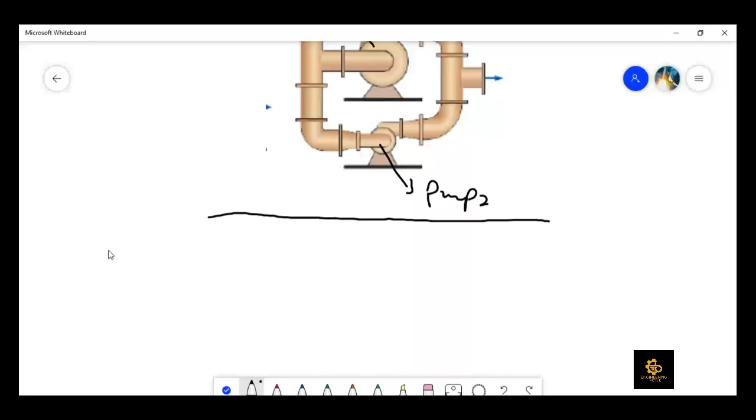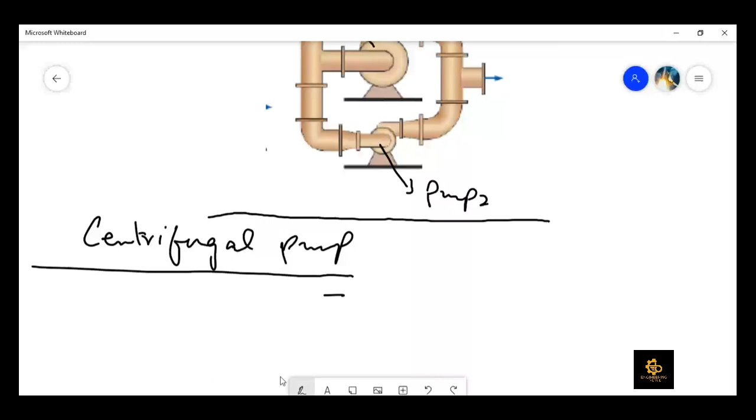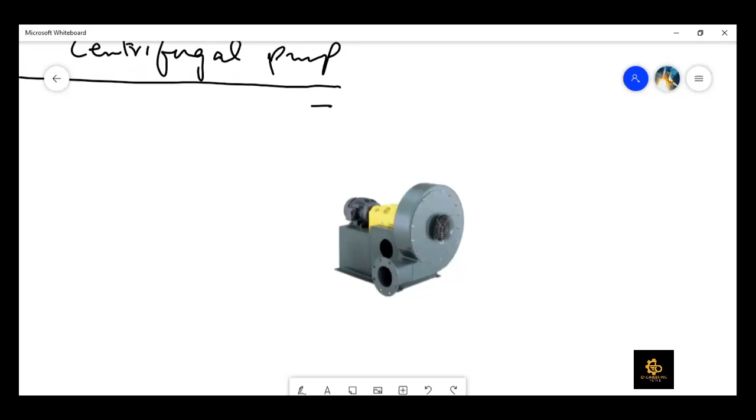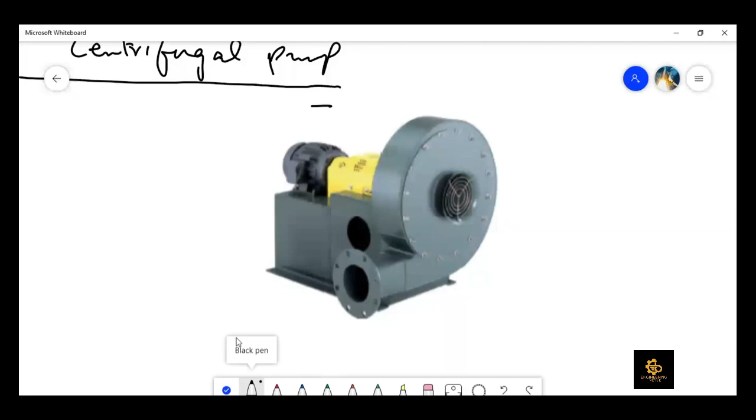If I can show you the picture of the pump, maybe you can readily understand what I am talking about. So this is a picture of a centrifugal pump, and there are certain things you can see here. This is the motor, which drives the shaft. The shaft is somewhere here inside this, which is connected with the impeller, which is here, impeller, and then here we have got the impeller blade.

I could show you the schematic in a while, but just to tell you the operation: when we switch on the motor, this is the inlet, which is connected with the storage tank on the ground level, and then the water comes from here, goes inside this, and then it comes into this casing, which we usually call scroll or volute.

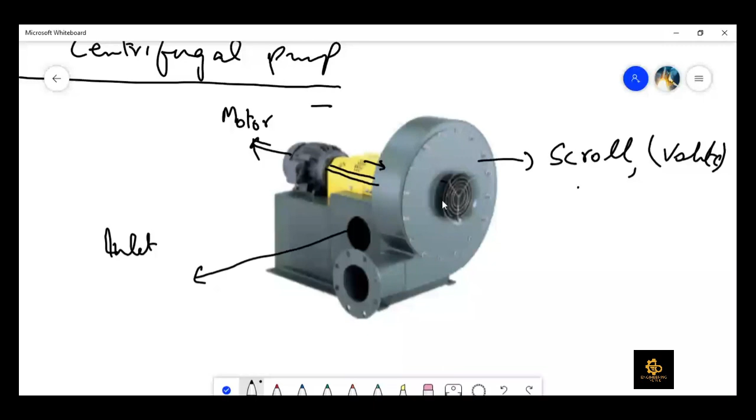So it comes into the casing, and then water flows in this direction, and inside this casing, we have got the impeller and the blade. So then it moves in the radial direction, and then it takes a circular motion, and then it comes out of this.

This is the outlet, and then this outlet has a pipe here which takes it to the overhead tank, right? This is inlet, this is outlet, this is motor, and this is the shaft. And inside this scroll, we have got impeller blades.

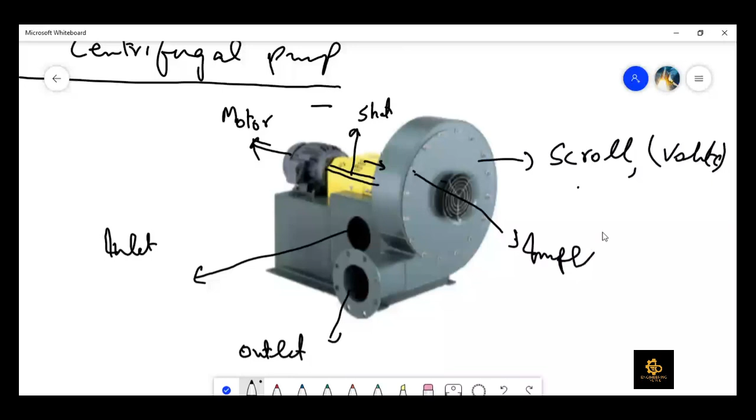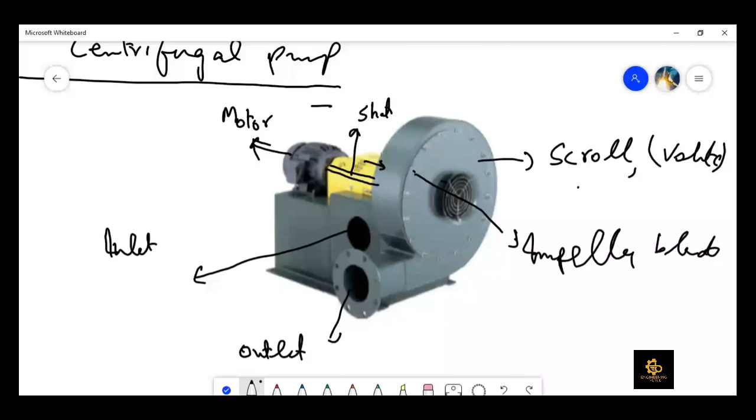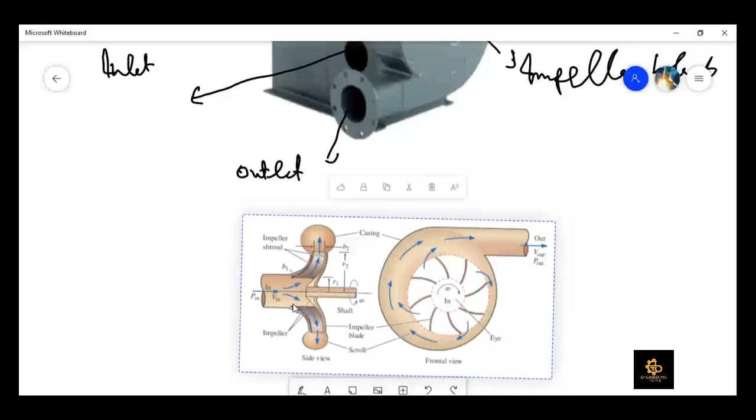Let me show you the schematic as well now, just to make things a little bit more clear. Okay, so here you can see some similarity.

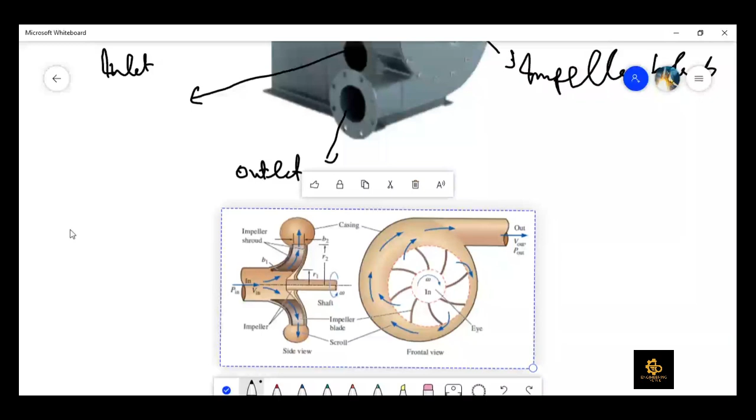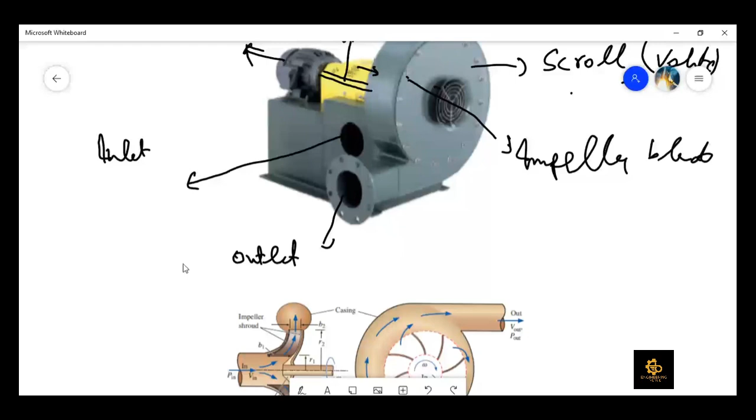So if we see it from the front, and reverse, it is the reverse of this. If we see it from the negative y-axis, it is kind of the same thing, right? And then if we see it from here, this side view - if we see it from here, that is the front view, and then this is the side view. So the side view is shown here, I think. Right? So this is the side view.

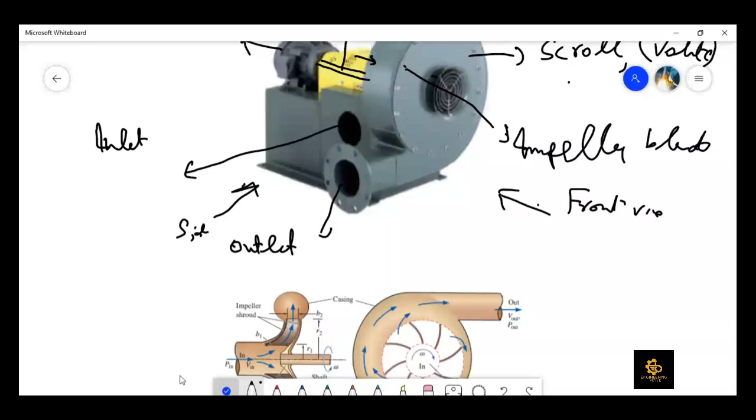So here, this is the shaft, and then it is coming in axially, and then it is going in the radial direction. And the impeller blade, which is inside this volute, is shown here. Right? So this is the shaft or the impeller eye. So it is rotating, and the flow comes here, and then it actually comes out of the board, and then it goes like this, right?

So first it comes axially in this direction, which is in the side view. For the front view, it means that it is coming out of the board. And then when it comes out of the board, because the blades are rotating, it imparts rotational kinetic energy into the fluid, and in the process, the velocity and pressure increase. Right, so this is the basic working principle of this.

And then second thing, if you realize here, if I show this thickness and this thickness, it is kind of increasing as the fluid goes towards the outlet. So it means, if I take it out and show it in a simplistic way, we are talking about a diffuser shape. So here it is minimum at point A, and at point B it is maximum. So A and B - so we know what is the characteristic of a diffuser?

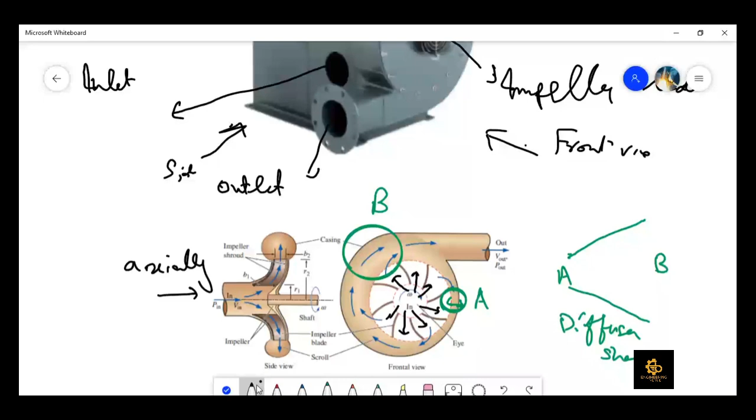That is - it increases pressure at the cost of decreasing velocity.

So it means that a dynamic head is changed into static head, and usually in case of pumps, we need some very high pressure at the outlet of the pump so that the fluid can travel against gravity towards its destination, whether that is an overhead tank or any other application. So for that purpose, we use higher pressure at the outlet, which is so at this point, if I write it,

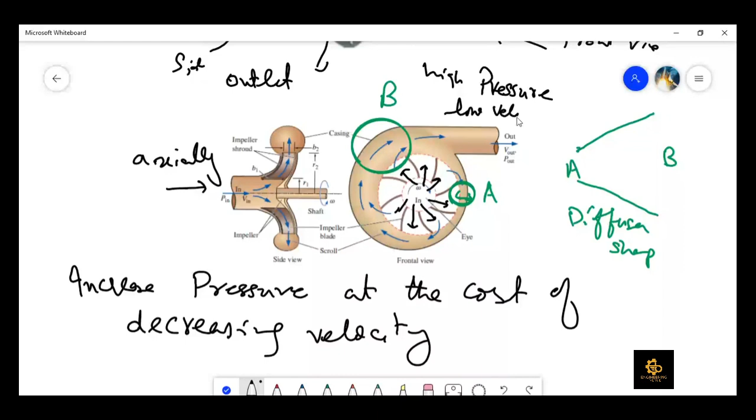high pressure, low velocity. But here at point A, high velocity and a little bit of lower pressure as compared to this at point B, right? As compared to at point B.

So this is the purpose of increasing the scroll area so that it can have more, which is shown here. It has got more outlet area. Inlet area is less, outlet area is more. So pressure increases at the expense of velocity.

This kinetic energy is a result of that velocity in the radial direction and due to the centrifugal force. So the flow leaves the impeller after gaining both speed and pressure. But a little bit of speed is reduced as it moves toward the outlet so that we can have high pressure at the outlet, right?

So this is a snail shaped casing, so we can recognize the centrifugal pump very easily. Usually the major purpose is to increase the pressure head at the outlet, not necessarily the velocity head. Because even if the velocity is lower, if the pressure head is there, the flow would move towards the overhead tank.

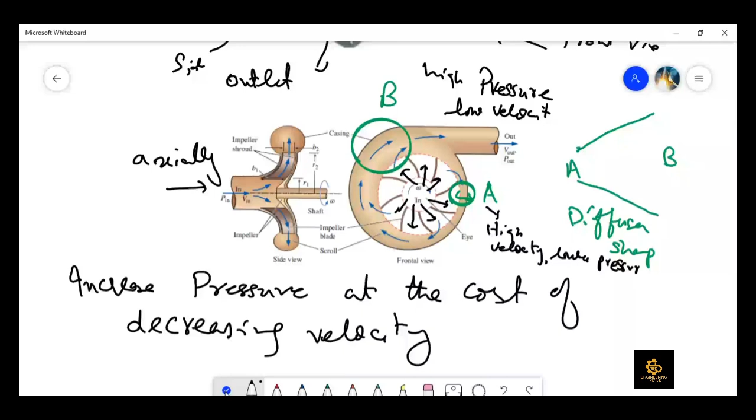One is called backward inclined blades. So the first centrifugal pump would have backward inclined blades. What does it mean backward? Because the flow is moving in this direction.

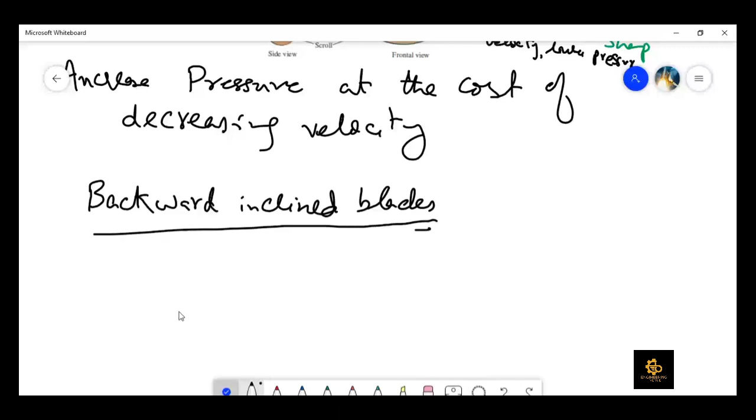So if we take it the forward direction, where the flow is moving, if you see the angle of the blade, it is in reverse direction. In this, let's suppose this clockwise direction is forward direction. So these are kind of giving the flow an anti-clockwise kind of direction. So that kind of blades are called backward inclined blades.

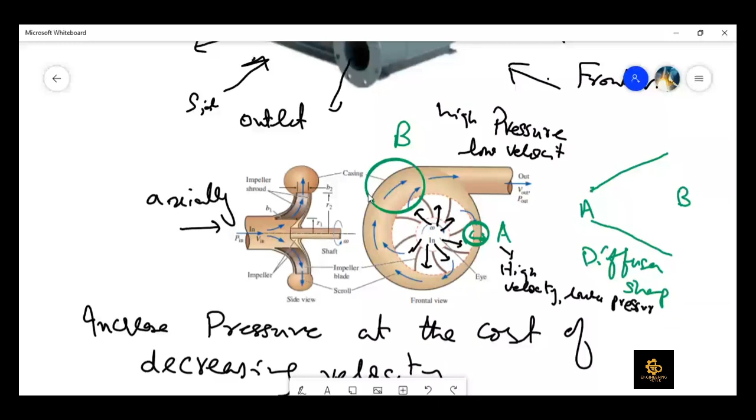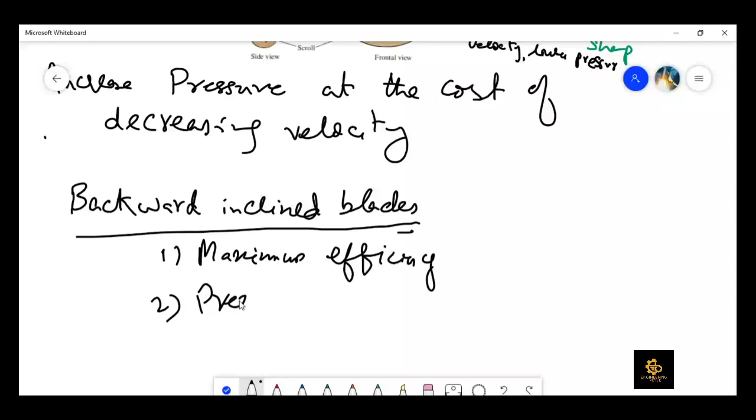And what are the major characteristics of backward inclined blades? It gives us maximum efficiency among the three arrangements, the pressure rise is intermediate, and the operating range is also limited. I would explain this third point when we discuss the characteristic curves in a while.

So now that was the backward inclined blades. Then the second type of blades, we call it radial blades. So what are radial blades? Let me show you the difference between this backward blade and radial blade.

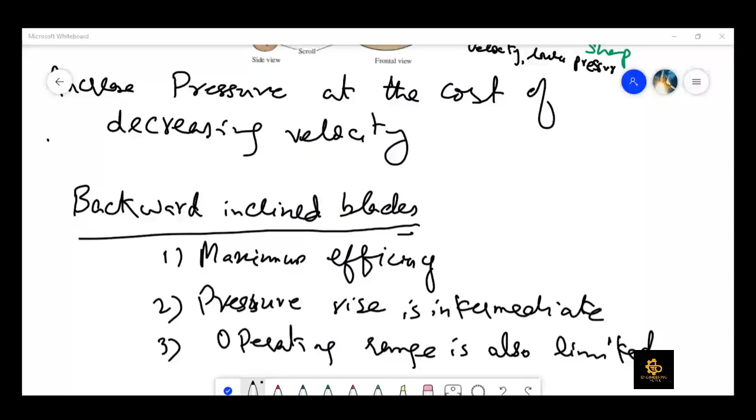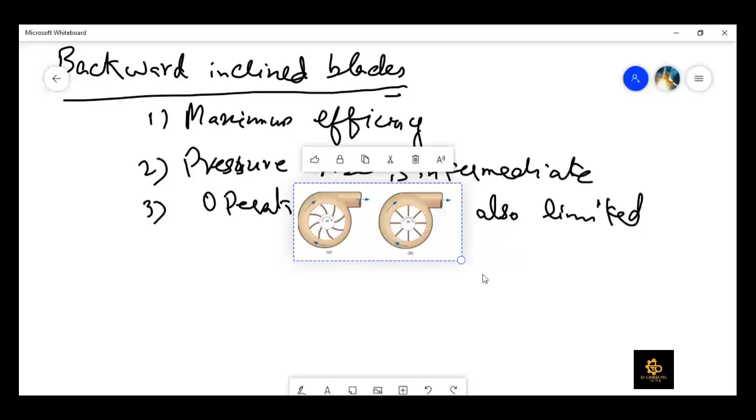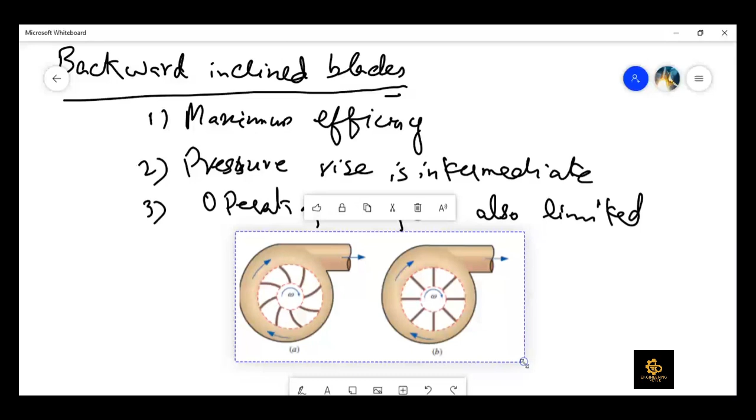Okay, so here you can see that figure A is backward inclined blade, because if the fluid is going in the forward clockwise direction, this angle of the blade is trying to give the fluid a backward anti-clockwise direction. And then this is a radial blade, so there is no angle imparted by the fluid blade, it is kind of a straight blade arrangement.

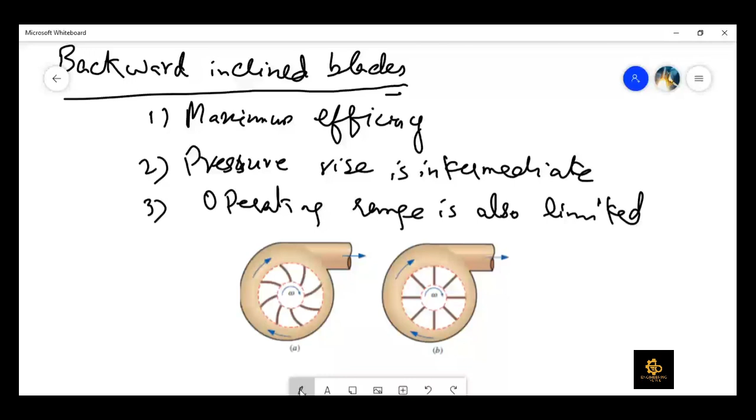So we call it radial blade, radial blade impeller. Right? So usually, what are the characteristics of this?

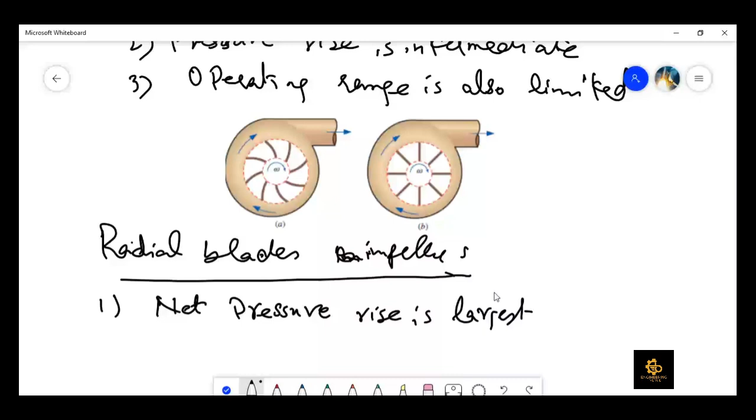That the net pressure rise is the largest in this case, but efficiency decreases rapidly

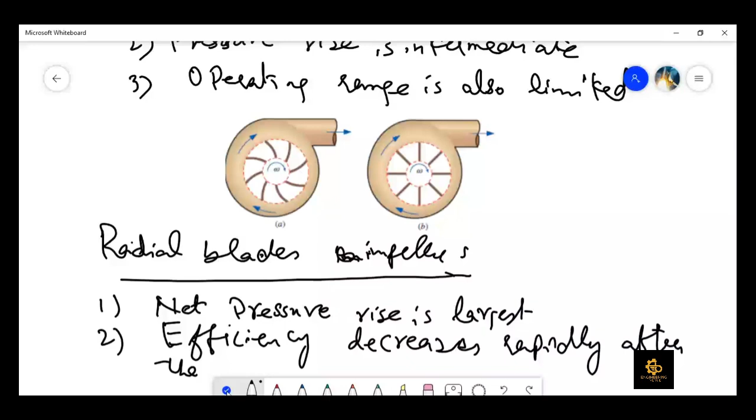after the BEP. What is BEP? BEP is the best efficiency point, the maximum efficiency point. After the BEP, efficiency decreases very rapidly, and also the pressure rise decreases very rapidly. We will see it in a while once we show the characteristics for these three blades.

So it means that the volume flow rate range is also limited. Right, and these were the second type of centrifugal pump blades.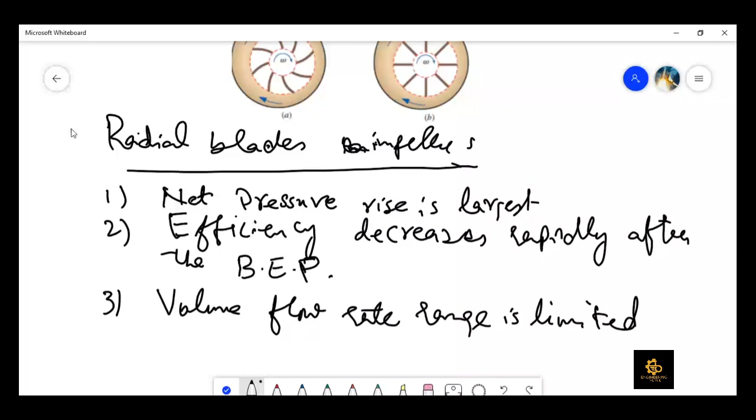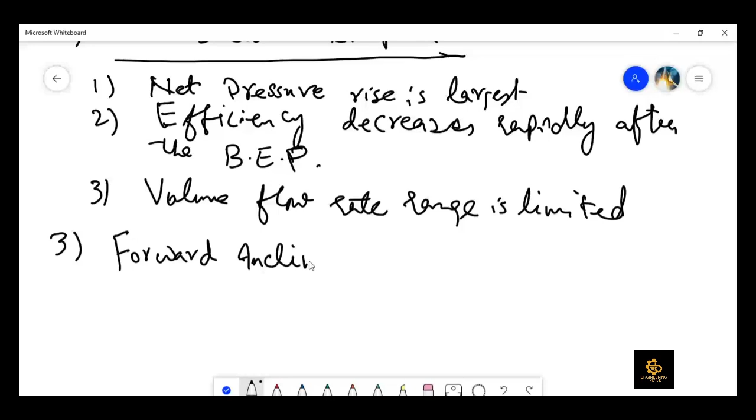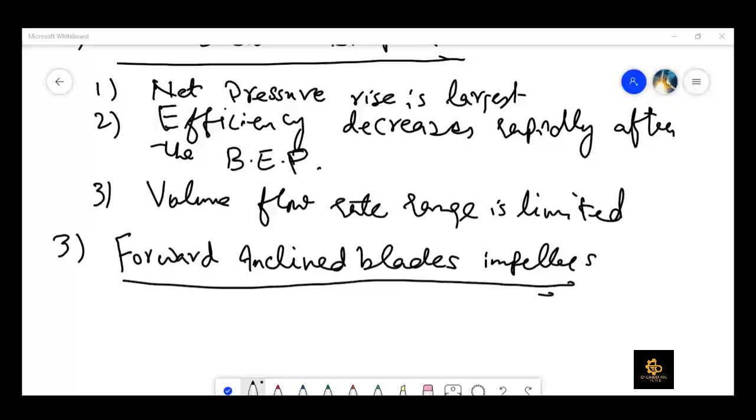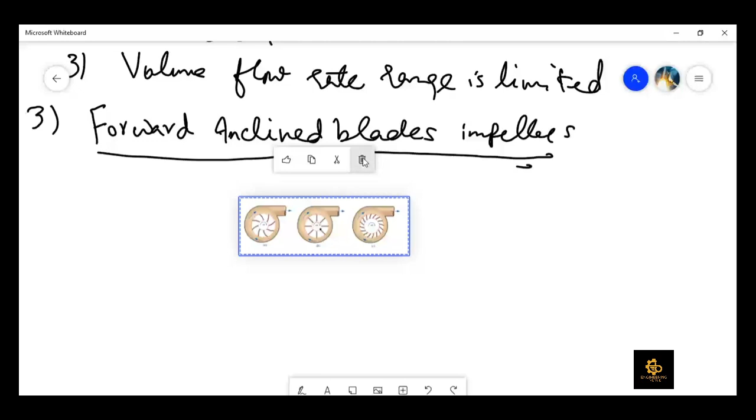Number three is what we call forward inclined blades. So let me show you the diagram for that. Now I'm going to show all three diagrams side by side just to make things a little more clear.

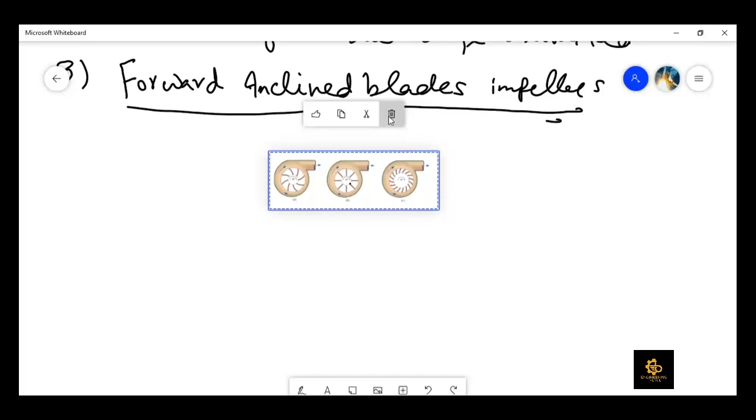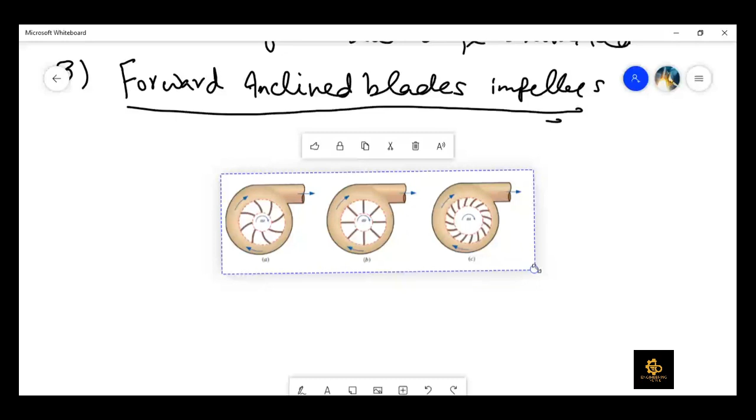So figure A is for the backward inclined blades, figure B is for the radial blades, and figure C is for the forward inclined blades. Now there are certain differences between these three blades which you can readily see in case of forward blade. One is it has got a very large number of blades as compared to the radial one and backward angle blades. Second thing you can see is that the impeller diameter or impeller eye is quite big. This circle here is very big.

Here it is quite small in both these cases. So what is the consequence of this? The blade length is quite small in this case. So it can accommodate more volume flow rate, or it can be used for a larger range of volume flow rate applications. So usually we install forward inclined blades when we require a constant pressure for a larger range of volume flow rate.

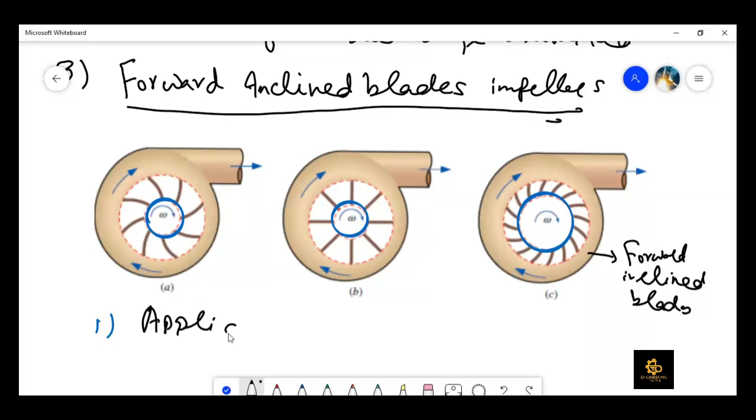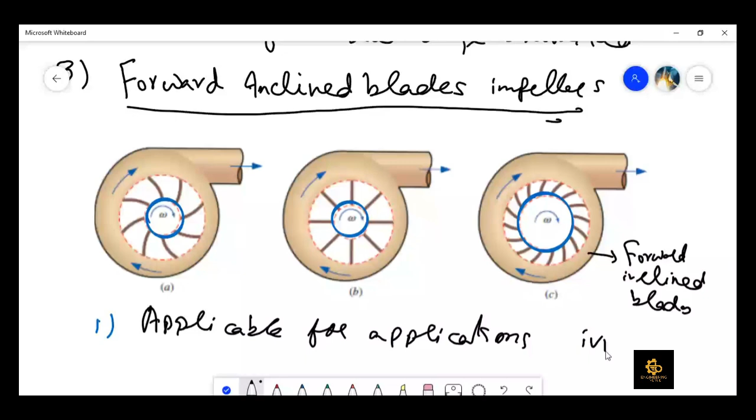So let me write it: applicable for applications involving a wide range of volume flow rate. So it has got wide range application.

So in case of forward inclined blades, it has got the pressure head which is minimum. The pressure head rise across the blade is minimum. How do we know that? Let me show you the characteristic curves for the three arrangements.

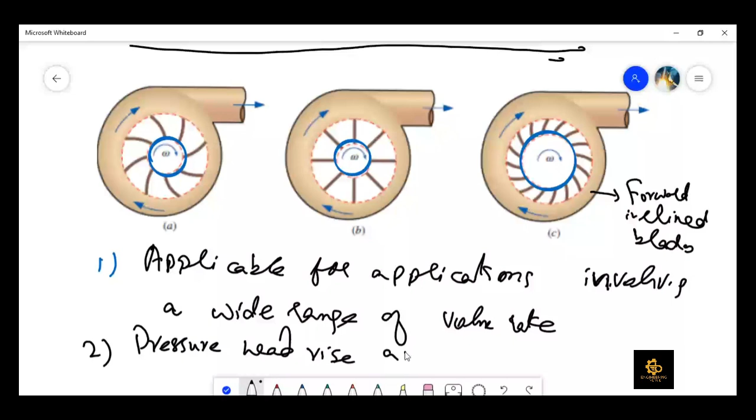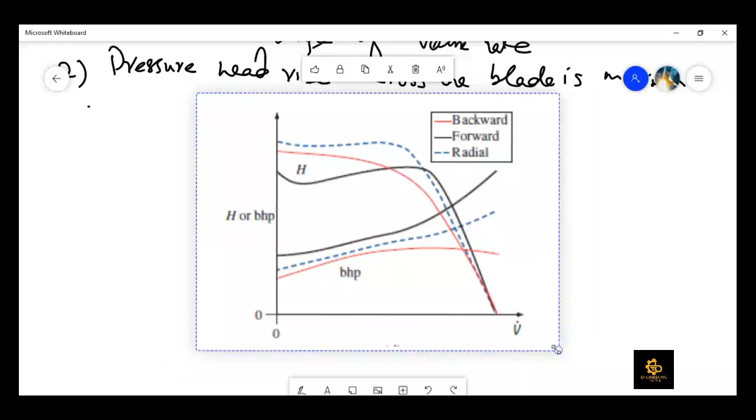Here you can see the curves which are for the net head for a certain kind of arrangement. So if you can see, the radial one gives us the maximum head. But what is the drawback for this? After this point, the net head drops very sharply.

And it even decreases for the backward one also. But for the backward one, the decrease in head is a little bit gradual, as shown by this line. But for this dotted line, you can see that the slope of decrease is very rapid if we increase the volume flow rate beyond this point.

But for the forward one, you can see that it maintains a very acceptable pressure head even for a larger volume flow rate. So it means that if we want to use a pump that can be used for a wider range of volume flow rate, then we would prefer the forward inclined blade. But if we want a pump operated in a very small range, up till this point, for smaller volume flow rate, then the backward one is the best, because it gives us the maximum efficiency.

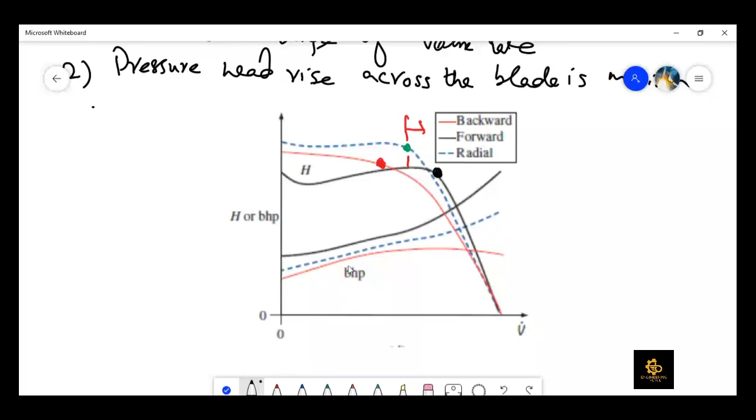And then you can see the BHP values. What is BHP, if you remember? BHP is tau into omega, where tau is the torque. So for a given rotational speed, this forward inclined blade would give us the maximum torque, followed by the radial one, and the least is given by the backward one.

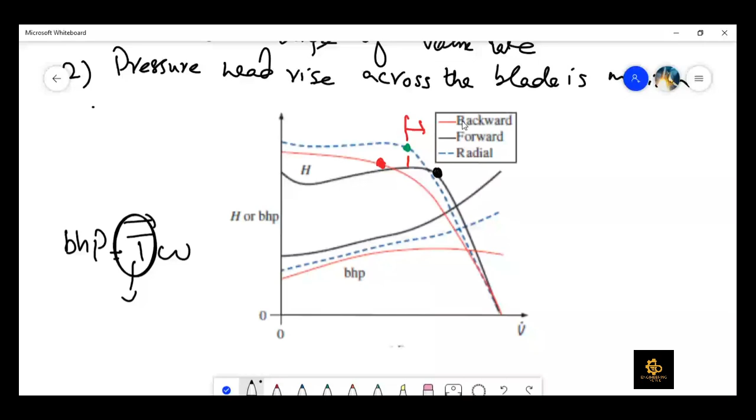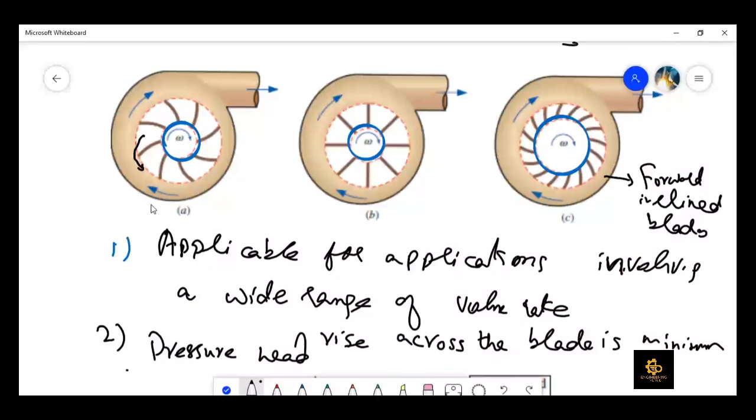Because backward, as you can see here, the flow is going to come in this direction, but actually it should go out. So there is a little bit of loss in BHP due to this reverse motion. But because it gives us very high pressure head, that's why we use it. So the pressure here is very good, so usually we can use it.

So just to summarize, if we want to use a situation or application where we are not sure about the range of volume flow rate, then we usually use this forward inclined impeller pump. Otherwise, if we want to get the maximum efficiency out of the pumping system, then we would use the backward one. So let me write it here.

If I can summarize it, if we want a wide range of volume flow rate, we will use forward inclined blades. If we want maximum net head at lower volume flow rates, then we would go towards radial blades. And if we want maximum efficiency at lower volume flow rates, then we would go towards backward blades.

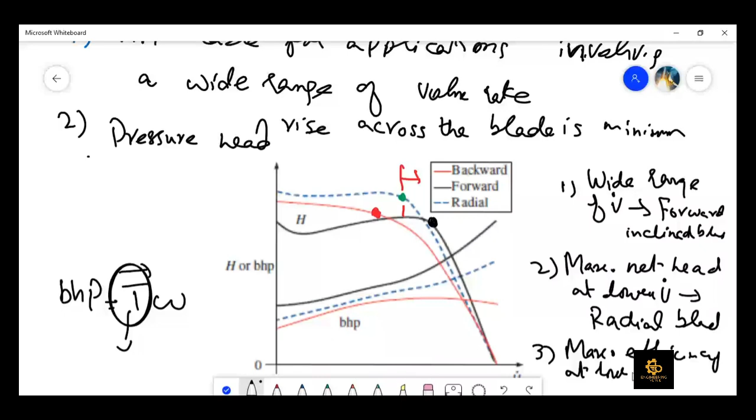So what is efficiency, by the way? Efficiency of a pump, if you remember, is the useful work imparted on the fluid, divided by BHP.

So these are the three parameters we usually use for the selection of the inclination of the blade angle, whether there is zero angle, minus angle, backward angle, or forward angle. These are the general selection criteria we usually use, right?

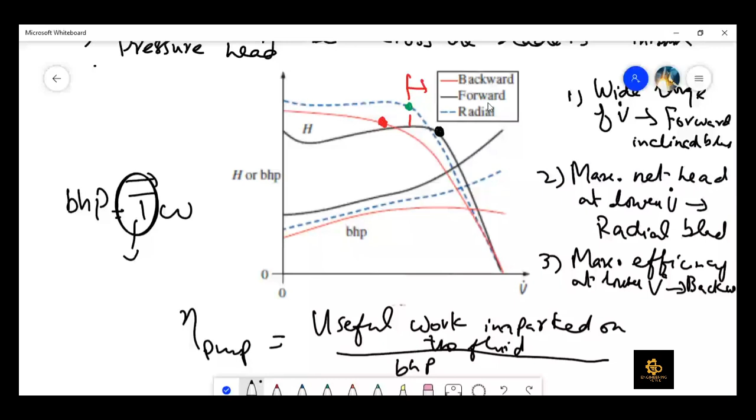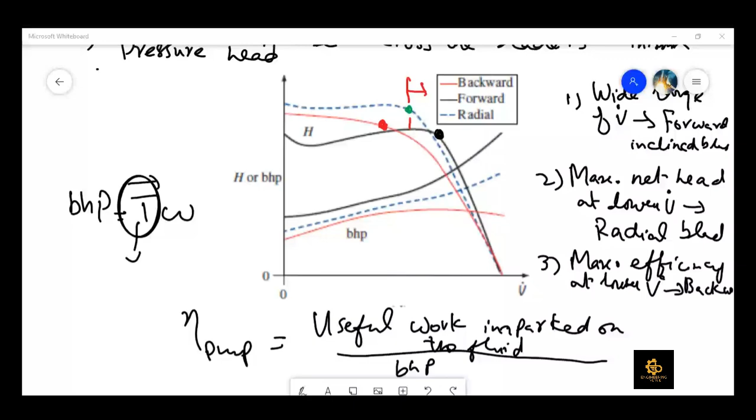So we discussed this, and now we can quickly go through the axial pumps, maybe in 5 minutes, because I just need to show a couple of slides for that. Let me tell you, it will take much less time, because I am just telling you the different types and working principles, since in the remaining classes we will discuss hydraulic turbines as well.

So we have just seen these characteristics for the centrifugal pump. Now we move on to the next type of pump, which are axial pumps. So what is the difference between centrifugal pump and axial pump? Before we move forward, what is the application of centrifugal pumps?

They are quite widely used. Let me tell you where they are used. They are used in home appliances like dishwashers, washing machines, dryers, water settling pumps which we usually install in our home, hair dryers, vacuum cleaners. They are also used in cars, the water pump in the engine, the air blower used for AC or heating applications. Centrifugal pumps are also used in industry, for building ventilation systems, washing operations, cooling ponds and cooling towers. So they have various applications.

Now we discuss briefly about axial pumps. What is the basic example of axial pumps? That is the ceiling fan we usually install in our home. They are a kind of axial pump, right? Or we call it, well, we call it a fan, because we are not concerned about the increase in pressure, but we are more concerned about the increase in volume flow rate, which strikes our body for the sake of therapeutic cooling to give us some comfort in summer.

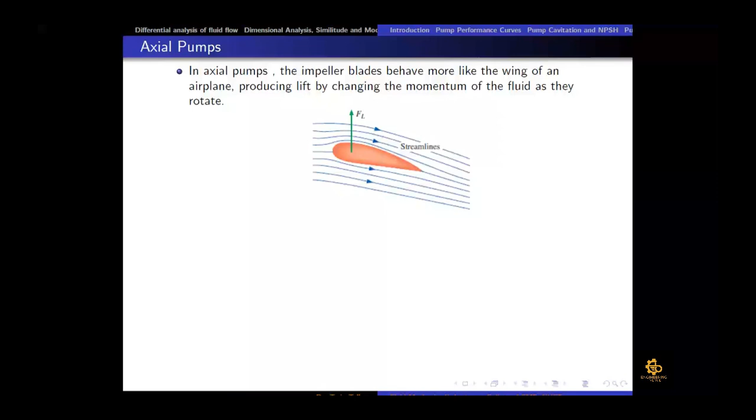And the second example of axial pumps, or axial fans, or propellers, is the blade of a helicopter. So what is the difference between axial pumps or fans and centrifugal pumps? The direction of flow remains almost perpendicular to the rotation. So the flow would come in this direction for the helicopter, coming from the top to bottom, and then go down, because the high pressure region would be created in the lower region, so there would be lift created in the upward direction.

So the lift force on the blade is caused by the pressure difference between the top and bottom surfaces of the blade, and the change in flow direction leads to a downwash, a column of descending air through the rotor blade. This kind of lift generation we also discussed in chapter 9, when we said there would be a high pressure region on the lower side and a lower pressure region on the upper side, so that the lift, that vertical force, would be there.

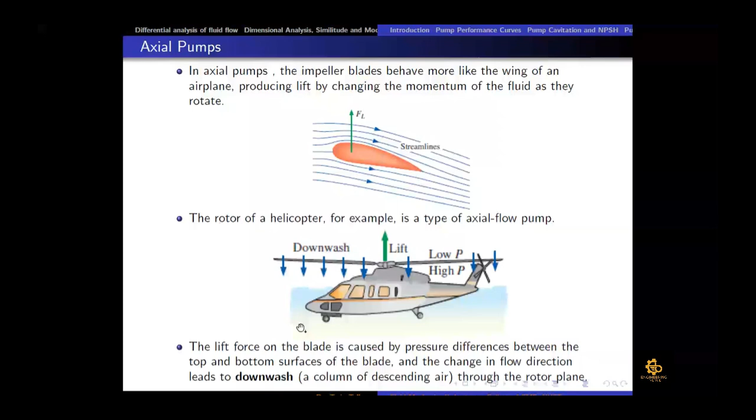Another example of that is the propeller, like this horizontal propeller. The rotor rotates in a vertical plane here, it's rotating in a horizontal plane. So that was the blade of this. But there are also some blades which rotate in the vertical plane, so that is called a propeller. We have ship propellers as well as aircraft propellers, like the C-130, which has some propellers in that. So both the helicopter rotor and the airplane propeller are examples of open axial flow fans.

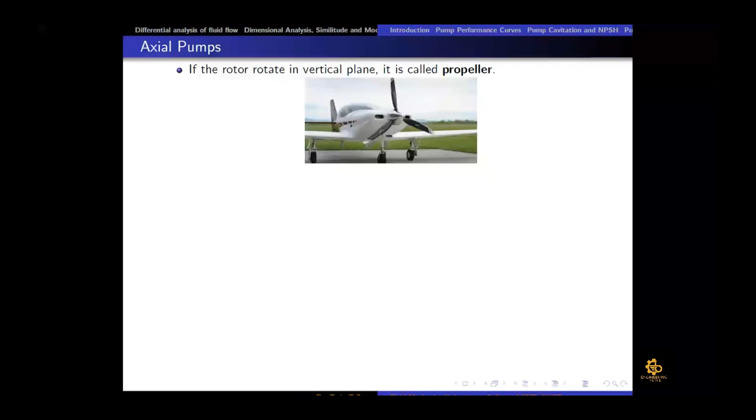Since there is no duct, there is no body bounding that flow. So they are open flow, like a ceiling fan, with no kind of casing. But in centrifugal pumps there was a casing - if you remember, that is the casing, if I can show you. This is the casing, so that is a kind of closed body pump. But these are open flow pumps or fans.

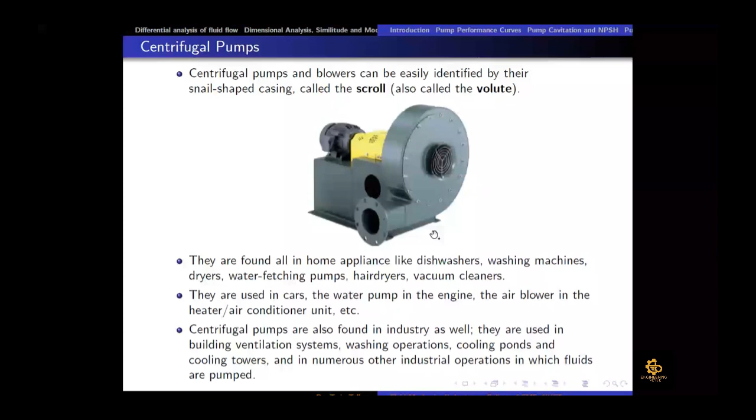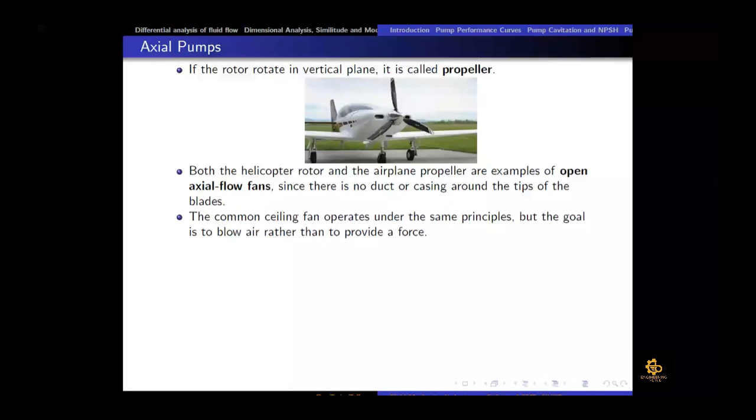So a ceiling fan is also the same. Then there is a fan which is installed in your laptop or desktop, that is also kind of this thing. So this is also an example of a ducted axial flow fan.

So usually we use axial pumps in stages, because the pressure rise across one stage of the axial pump is lower. That's why we put stator, rotor, stator, rotor. Like in thermodynamics you must have studied the multi-stage pump or turbine. So usually we use axial pump or turbine arrangement in a multi-stage arrangement in which we have a stage of stator blades and rotor blades, then afterwards again stator, rotor.

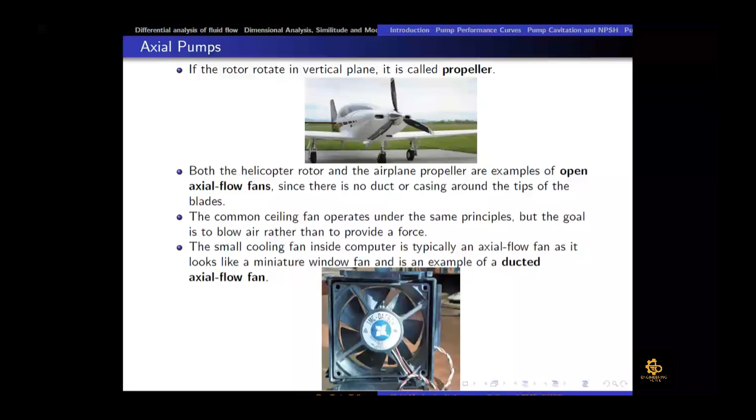Maybe I can show you those stages in the figure shown at the beginning of the episode. Can you see this figure on the left hand side at the bottom? You can see multiple stages of the blades. So this is the axial compressor or turbine which is installed for a nuclear power plant or a gas power plant. You can now see multiple stages here.

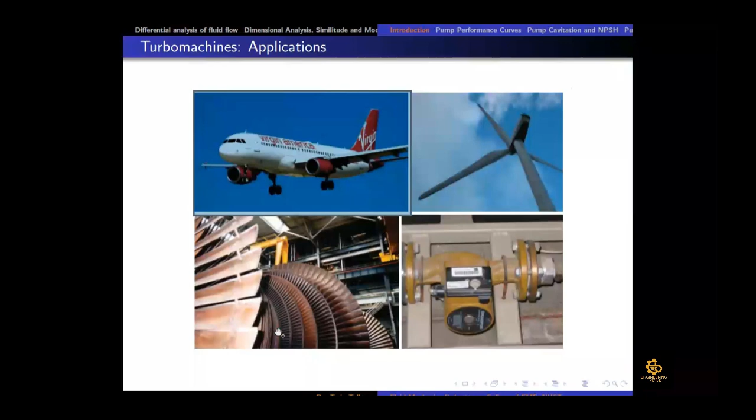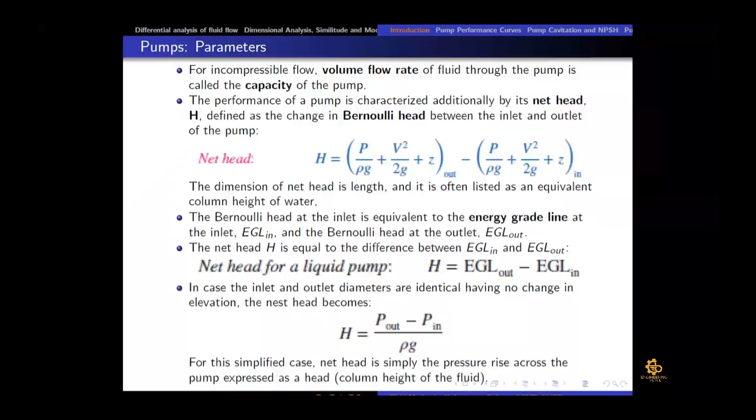But in a centrifugal pump there are no multiple stages, there is only one kind of thing. So the last thing which I need to mention here is the characteristic curve.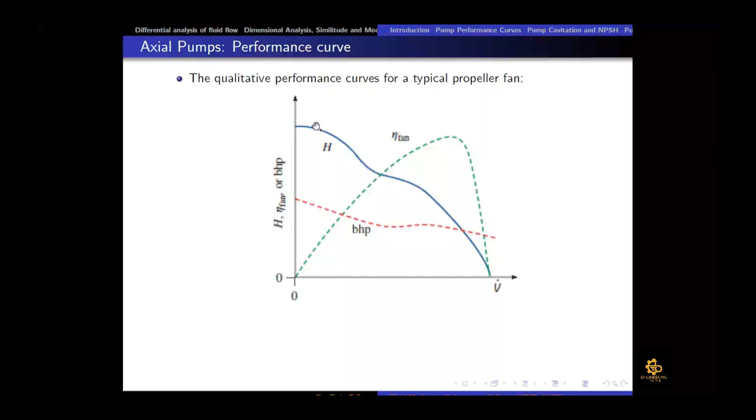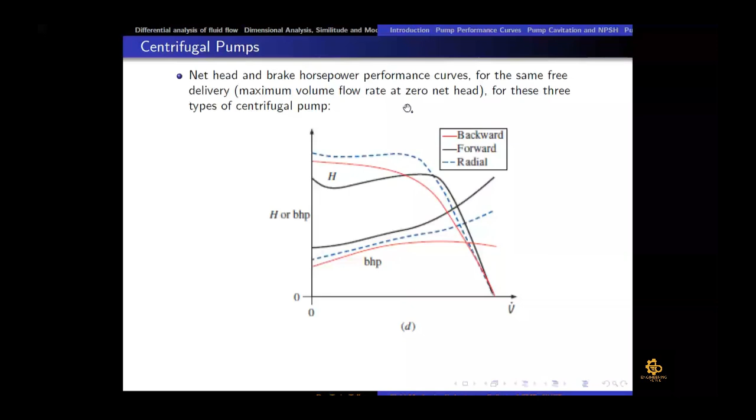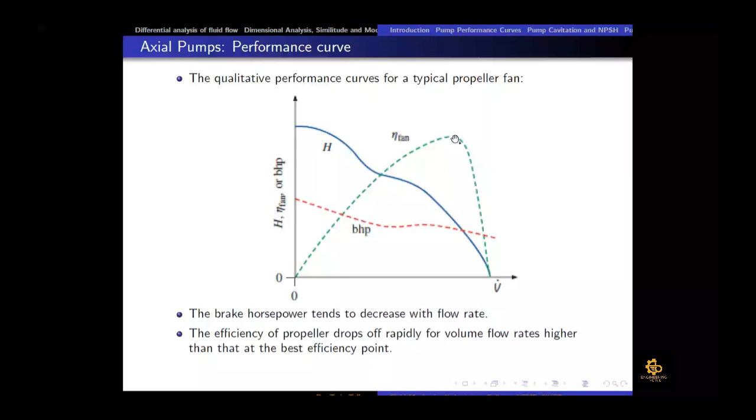So just to give you an idea, that is the comparison between a centrifugal pump and axial pump. So usually, broadly speaking, if we are talking about an arrangement where we have a compressor, we usually don't use a centrifugal pump for that. We usually use an axial compressor, usually.

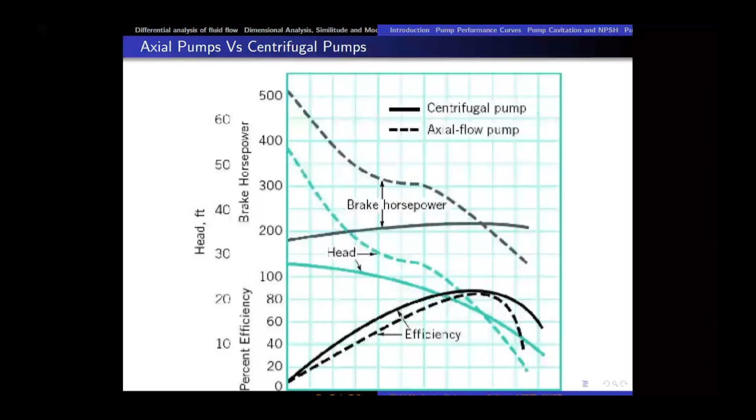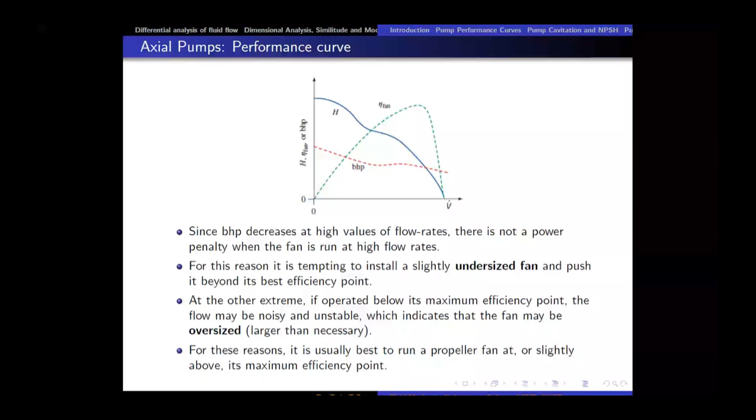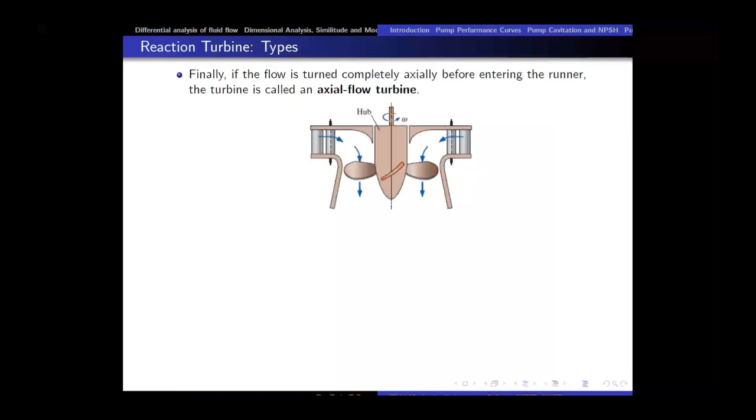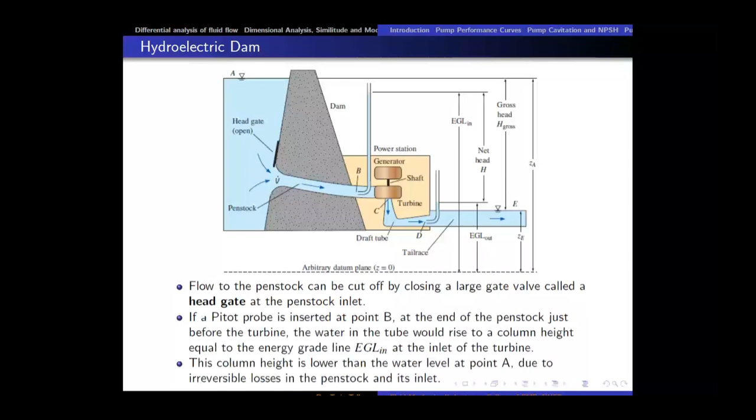So that was it for today's lecture. From the next class we are going to discuss turbines, and in that we would discuss different classifications - impulse turbines, reaction turbines - and then at the end of this course we will discuss hydroelectric dams like the Tarbela Dam, Mangla Dam. It is necessary that you know the working system. Hopefully we would be able to cover it in 4 hours of time, so hopefully you would have a better understanding of technology by the end of this course. But again, as I said, it is just a tip of the iceberg, so I hope you can get more knowledge.